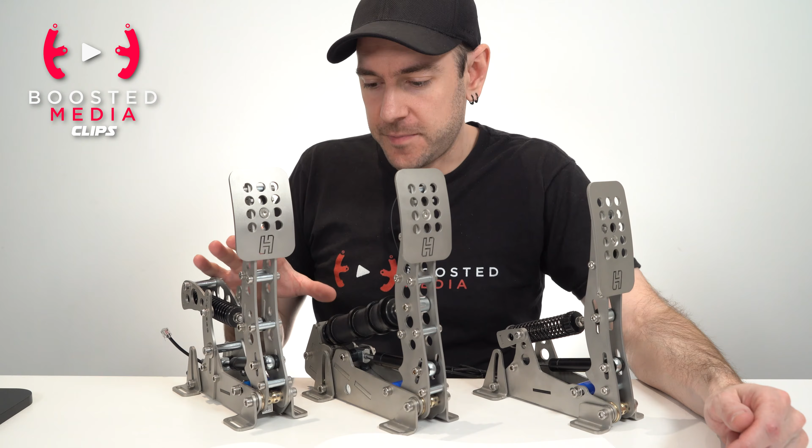Now there are a multitude of adjustments available across all three pedals, and that's one of the things that I loved about my previous set of Ultimates, was just how much fine tuning there was available to not only dial into my own personal preference, but to the different styles of cars, and so simulating the types of different cars that are out there, from street cars all the way through to Formula style and GT style race cars.

Now, what I wanted to do here is a little bit different from what we normally do. I actually want to try and integrate the manual into this process a little bit as well. And what I would recommend is, if you are looking at buying a set of these pedals, actually go and download the manual from the support section of the Heusinkveld website for yourself, because this manual is exceptionally well written and it really does take you through every single little detail and exactly how to adjust it.

And I think it's a good idea to establish an understanding of all this stuff before you actually receive the product. That way you can kind of just dive straight into it. You kind of already know what you're doing, and it's not such a steep learning curve that takes away from the joy of, you know, getting these pedals up and running and driving straight away.

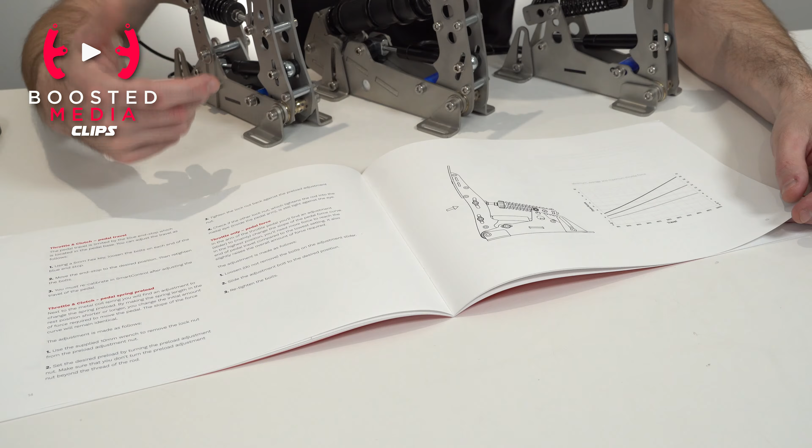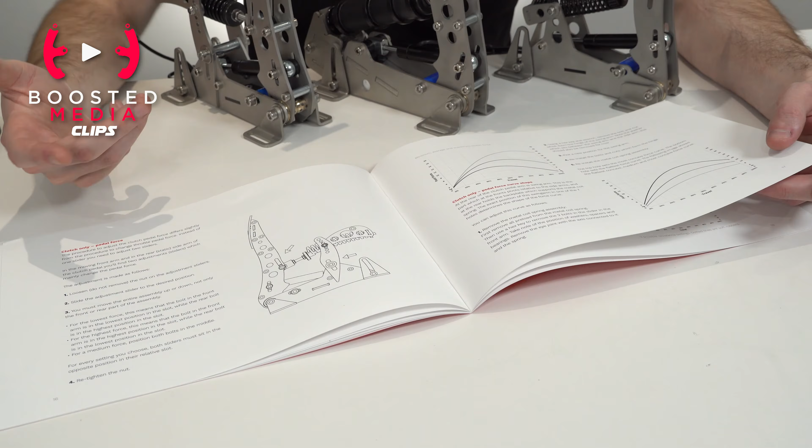So let's just quickly thumb through the manual now. You can see clear descriptions of each of the adjustments that we have available, as well as graphs that are actually mapping out the force and how it applies, whether it's in a linear or non-linear fashion. We can go through here, clutch pedal force, again, graphs that demonstrate everything. I mean, the amount of detail that they go into here, even one little thing I noticed was he mentioned that when you undo the bolts for adjusting the pitch of the pedals, you don't have to worry about the whole thing falling apart on you.

And I think this is really important, because a product like this can be quite overwhelming, and you can kind of be left wondering whether you're actually getting the best experience out of it, simply because of the amount of stuff that you can change. So reading through this, for me at least, really kind of fills me with the confidence to know that I am going to be able to dial it in for the best experience.

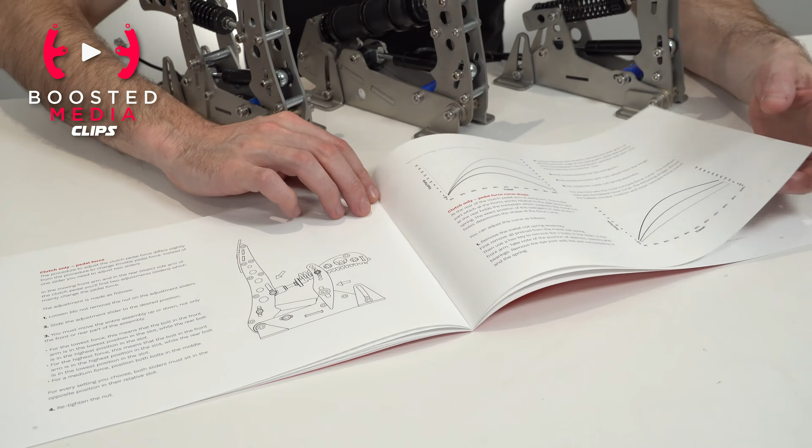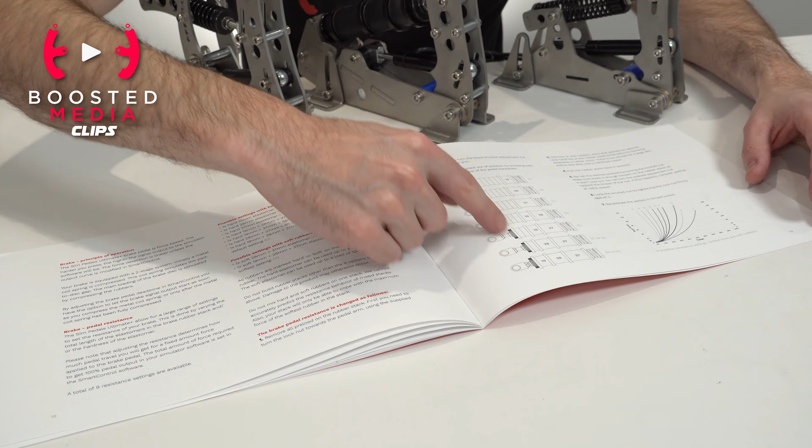So we'll keep going here. Again, this is through to the brake adjustments here. Now you can see the 9 different adjustments that we have between hard and soft springs. And even just here, there's a visual diagram of exactly how that's configured. So yeah, a massive amount of detail here.

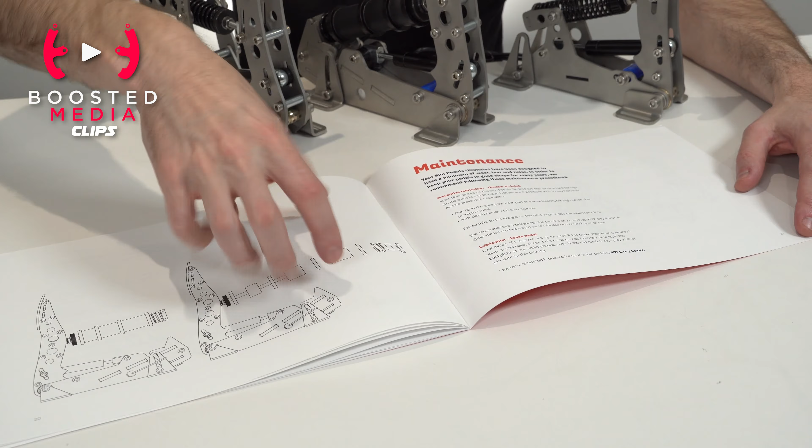And I would once again recommend that you guys download this if you're looking at buying these pedals and getting across it yourself. You can see there an exploded view as well that shows how the assembly goes together. Really, really good stuff. And yeah, something that I really do think sets this apart from other products that we reviewed here. So let's take a more detailed look now at the mechanical adjustments available on all three pedals.

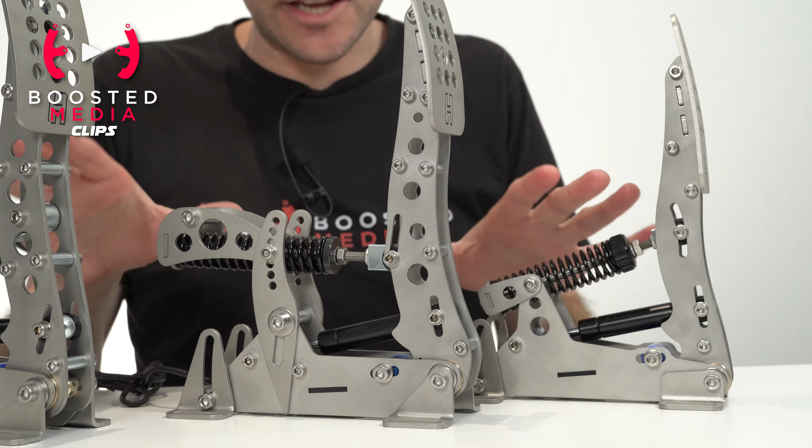So as we mentioned earlier, all three pedals have the same adjustment when it comes to pedal angle or pitch. So we have that 15 degrees of tilt as we demonstrated earlier. As we mentioned before as well, we can adjust our pedal plate. So let's just quickly demonstrate that. So we'll grab our Torx key.

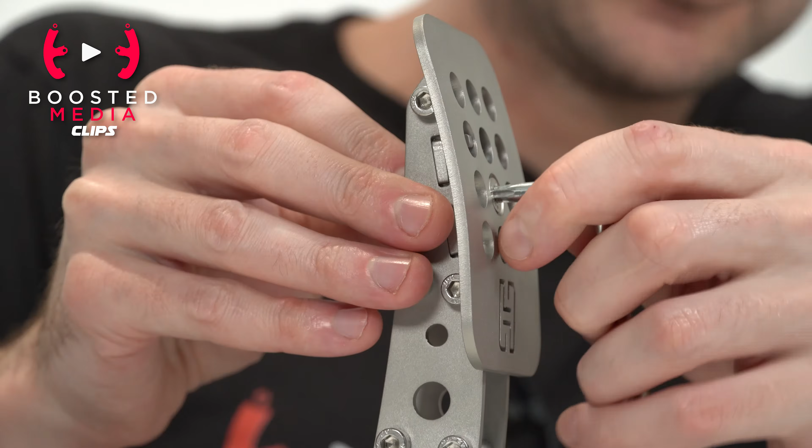Now, one thing I did notice, it wasn't mentioned in my notes, is that they are now using a Torx bit for these pedal faces. So on the set that I had, at least, it was an Allen key previously, and I did have an issue with that stripping out on one of my pedals. This probably has been updated for a long time now. It's probably not something that's unique to the Ultimate Plus, but it was something that I noticed that had changed since my early edition Ultimates.

So we're gonna undo the little nut on the back here. Simply unscrews. So it's just a standard little nut there, not a nylock or anything. And then the bolt slides out, like so.

And then we've got our pedal face. You can see there's a little notch there as well. And then we've got our hole, which is countersunk for mounting the actual screw. And then if we have a look at the face itself, you can see our 3 points of adjustment, and there's a 13mm difference between the 3 of them.

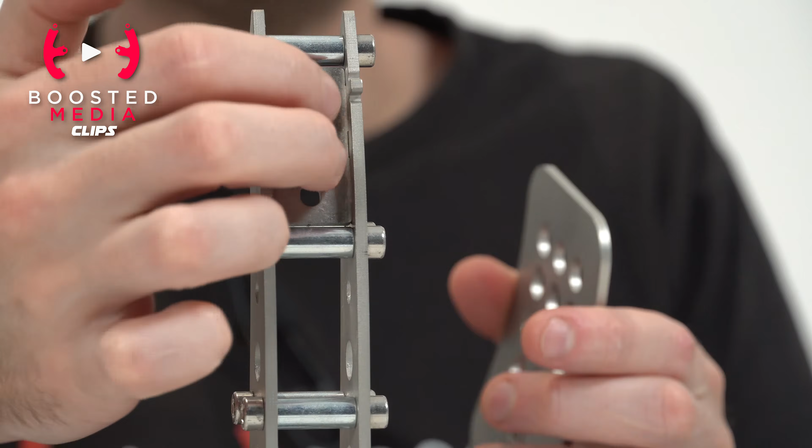So in the bottom position, I'm just going to be careful to line this up properly. So there we go, bottom position, that is 252mm high. Then we go up to 265, which is the default position, and then we can go up to 278mm, which is again another 13mm increment. So we're going to set that to the middle position where it was. That is perfectly fine for me. Simply pop the bolt back through the front, and nut goes back on the back, and we're good to go.

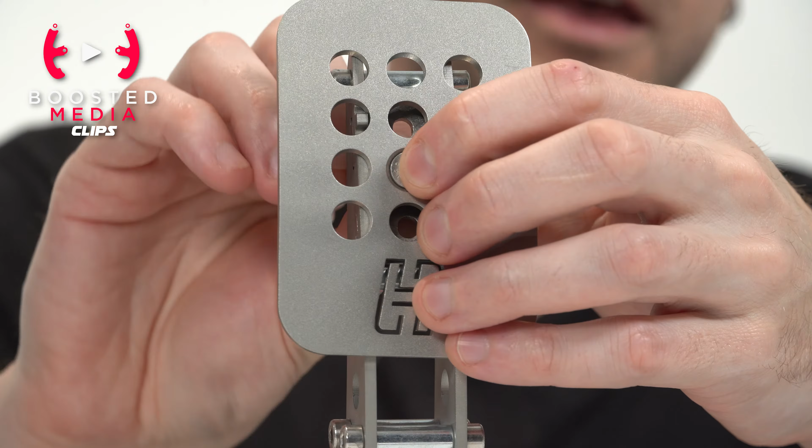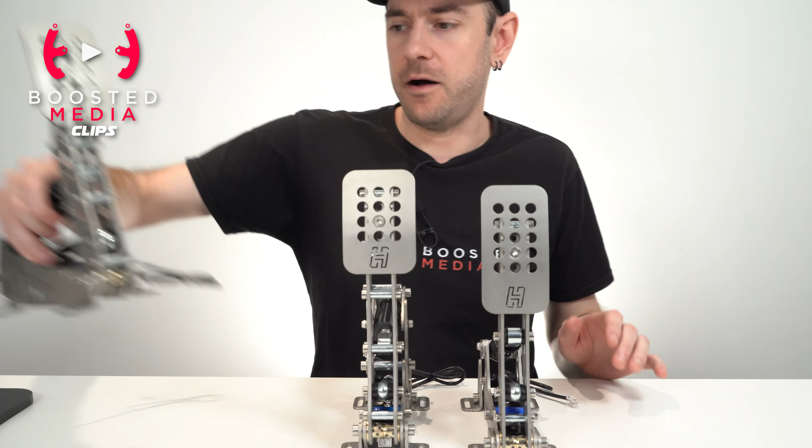So same adjustment across all 3 pedals. Obviously the height is slightly different for our throttle pedal, as you can see here, but otherwise the adjustment parameters are the same. So next up, some adjustments which are unique to the throttle and clutch. So we'll set our brake aside and let's have a look at these guys.

So with our throttle and our clutch, we have the ability to adjust our pedal travel. So the amount that the pedals push down. A little bit harder to push the clutch here on the table, but you get the idea. We can also adjust our overall pedal force, or the amount of force that's required to actuate the pedal, and our pedal spring preload, which is the adjustment for the spring tension here.

So pedal travel is a very simple adjustment. As we saw before, the little blue urethane bushing, all we need to do is just loosen off using the included Allen key the 2 little bolts, just crack those. And then with those bolts adjusted, all we need to do is simply slide

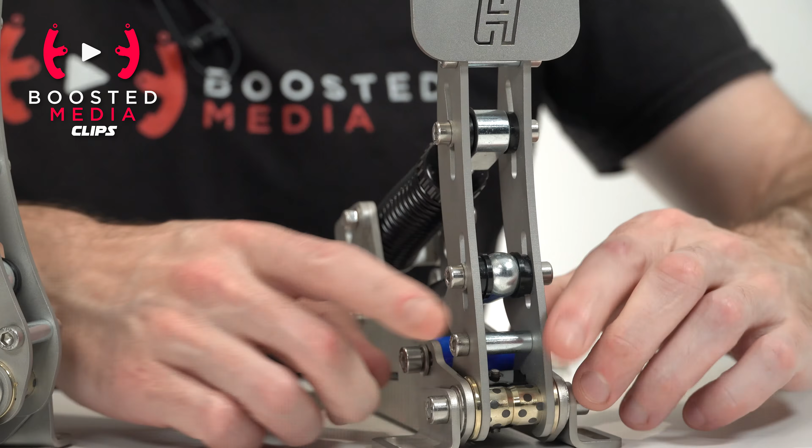forward to reduce the throw, or slide back to increase the throw. It's a little bit difficult because that bushing is squeezed in there quite tightly, but just pull it back all the way forward. And you can see now we have a much larger amount of throw there available. I'm going to actually set it back to close to where it was. I think that their factory preset is pretty good.

Now, one thing just on that note that is important to take note of is the fact that these are pre-calibrated from factory. So as soon as you make any adjustments, you will need to go back in and calibrate them again. But obviously we're going to do that as part of this video anyway, so it doesn't really matter. But just so you know, if you do fiddle with them, you will need to recalibrate. So just make sure it's nice and straight. And then once we're happy, we can tighten that back down.

So next onto spring preload for, again, the throttle and the clutch. This is unique to just these two pedals. So again, we'll work on the throttle pedal here, but it is exactly the same in terms of preload for both pedals. And just referring to the manual here again for the explanation on exactly what this does. By making the spring length in the rest position shorter or longer, you change the initial amount of force required to move the pedal. The slope of the force curve will remain identical.

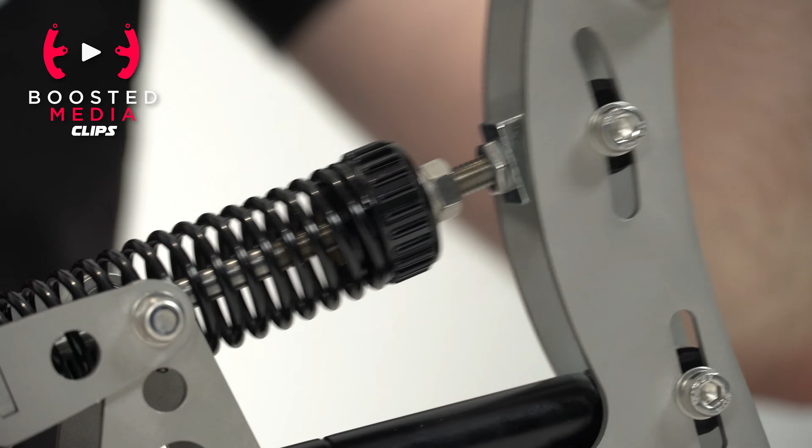So it's just adjusting the amount of initial force needed to get that pedal moving, but it doesn't change the linearity of the force that's applied as the spring compresses. And that makes sense because it is a linear spring here. It's not a progressive spring. So it's not going to change in characteristic as it compresses down.

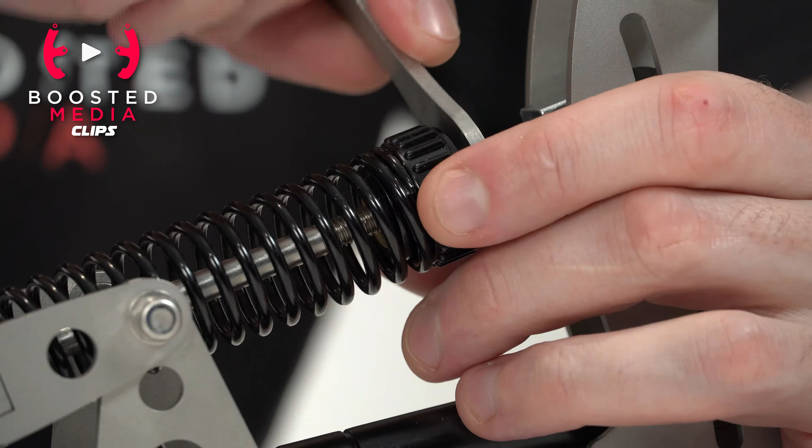So what we do is we take our 10mm little shifter here, or spanner that was included in the box. We loosen off our retention nut like so. And then all we need to do is just wind in or wind out this little collar here. Winding it in increases the preload. Winding it out decreases the preload.

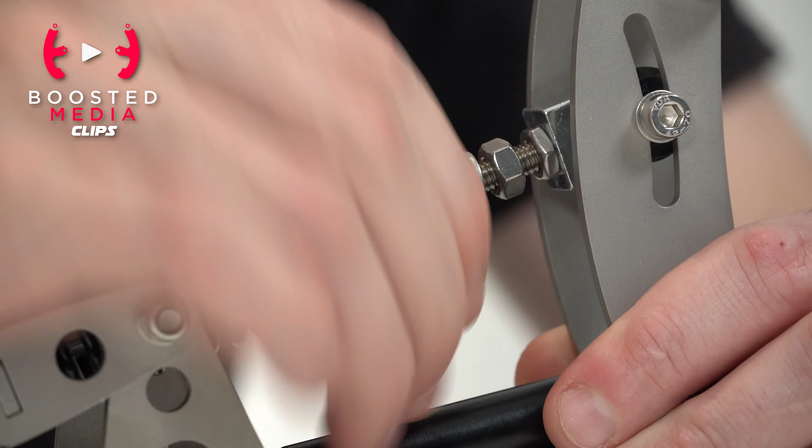We obviously don't want to decrease it to the point where the spring becomes non-captive. And what I mean by that is if you were to wind it out too far, and I don't know whether that's actually going to even be possible on these pedals, I'm guessing probably not. But if we wind it out all the way, you can see there, even with that preload wound all the way out, our spring is still captive.

It's not rattling around inside there, and it's still sitting firmly on the spring retainer or the spring perch that we can see just on the back of the adjustment knob here. So that's as simple as that for preload. And again, what that's doing is it's just changing the amount of initial force required to get the pedal moving. So I'm going to set that back to roughly where it was from factory again.

I do like to start off with factory settings as they recommend, and then make any adjustments from there. So we're just going to tighten down that little locking nut again as well. And if you want to, before adjusting these things, you can put a little mark there with a permanent marker, for example, so that you have a reference point and know exactly where it was from factory. If I was smart, I probably would have done that before I adjusted things, but too late now.

Now, just quickly on that, once you have made your adjustment, the manual suggests you also check the little nut here to make sure that's nice and tight up against the eye here. So let's just quickly do that too. I don't think that would have come loose. Yep, that's fine. So we are good to go. Obviously, you just want to make sure that all these things are tight, because anything that's loose will work its way free and move around when you're driving.

And anything that is loose and moves around is obviously going to change how the pedal feels over time while you're driving. And muscle memory, as we know, is extremely important when it comes to pedals, particularly with the brake pedal. So anything that's changing while you're driving is obviously going to ruin that muscle memory and make it a lot more difficult to be fast and consistent.

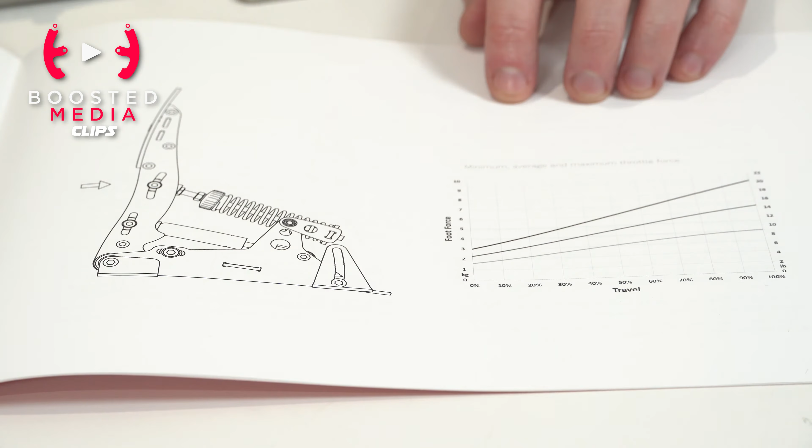Now, if we have a look at the manual here, we can see once again a very convenient force graph, which explains the relationship between the amount of travel and the amount of force that's required. But essentially what we're doing here is changing the slope of the pedal force curve. In the highest position, you'll need more force to reach the end of the pedal travel compared to the lower setting. It also slightly raises the overall amount of force required.

So the procedure for adjusting the pedal force on the clutch is a little bit more involved. We have two sliders this time instead of just the one. So what we've done is loosen off the two bolts, one on either side here. And again, we don't want to remove these because we don't want to have the assembly collapse from the inside. It's going to be a pain to put it back together again. And then same deal with the two bolts just in this position here.

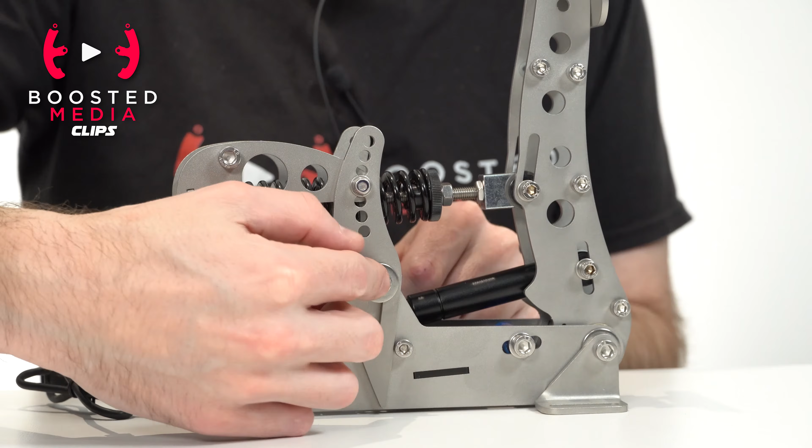What I also would recommend is make a little mark where your preload was set if you wish to, and then just back off your preload until that spring becomes non-captive as well. As you can see here, that spring's now rattling around freely. Releasing that spring tension just makes it a little bit easier to move things around without scraping up your brand new pedal.

So essentially what we have here is an adjustment which raises or lowers this entire assembly, as we can see here. So in the bottom position as it's set now, bottom here and top here, that is our softest setting. And as we move that up through medium, we get to the strongest setting at the top.

So you can imagine now it's going to require quite a bit more force to push that pedal in than what we had at the bottom here. So I'm going to leave that in the default position for now. But what you do need to make sure you do here, however, is raise or lower in proportion front to rear. So we don't want to end up twisting it. That's going to cause other things to kind of go out of whack here.

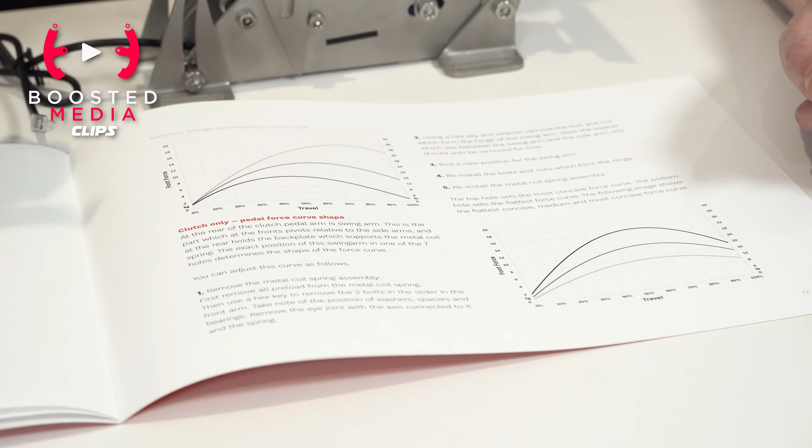So we're going to lower that back down to where it was. I'm going to tighten that up again. And then we can move on to the curve adjustment. So having a look at the manual again, we can see a nice graph which demonstrates the relationship between foot force and travel percentage. But we also have an adjustment here for our pedal force curve shape. And this is what gives us that two-stage effect with our clutch application.

So as any of you who have driven a real life manual car would know, when you push the clutch down, there's kind of a second stage where the bite point is. And this can vary quite a lot from car to car, which is often the reason why somebody who's very experienced with driving one manual car might jump into a race car, for example, and find that they stall it the first couple of times that they try to launch. So what we have here is an additional adjustment. And this allows us to adjust between the typical kind of feeling that we'd have in a street car and of course a race car.

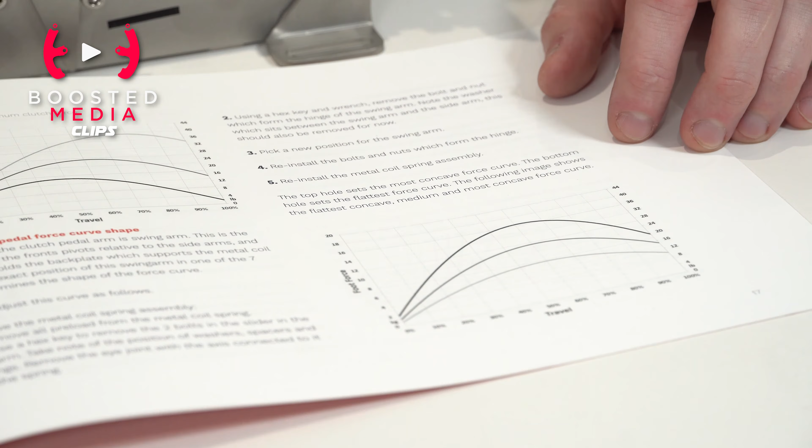So if we have a closer look here, as I push the clutch pedal in, you can see the spring compresses. And then as I get close to the maximum threshold, this whole assembly kind of pivots upwards. Now you can imagine here, if we adjust the position throughout these 7 holes, that's going to influence the curve here. And again, if we have a quick look at the manual, you can see a graph which demonstrates the most concave versus the flattest effect here. So we can't dial it out entirely, but we can reduce the effect by about half here, from 16 at maximum down to about 8 kilograms of force required.

So we'll pop that back out of the way. So what we need to do is again remove the 2 bolts. We can remove them entirely this time around. It's just a washer and then a bolt going through from the backside. We do want to remove the preload from our spring as well. Then we simply move this assembly up to the top for the maximum effect or down to the bottom for the minimum effect. Again, from factory it's set to somewhere in the middle, and I'm going to start off by testing it in that position, see how I feel about it, and then make any adjustments as I see fit.

But again, as was the case with my original Ultimates, just the pure range of adjustability that we have with these pedals really is outstanding. And I'm absolutely certain that regardless of what kind of feel you're trying to achieve, you're going to find something that's going to feel right for you with this clutch pedal.

Okay, so onto our brake pedal now. The adjustment that we have here is brake pedal resistance, of course, and there's a huge range of adjustability. But before we get into that, I just want to touch a little bit more on exactly how this design works, because it's fundamentally a little bit different from what we have with the throttle and the clutch. Remember before we talked about that little tiny spring which exerts a varying amount of force on the tiny little load cell. In this case, we have a massive 200 kilogram load cell.

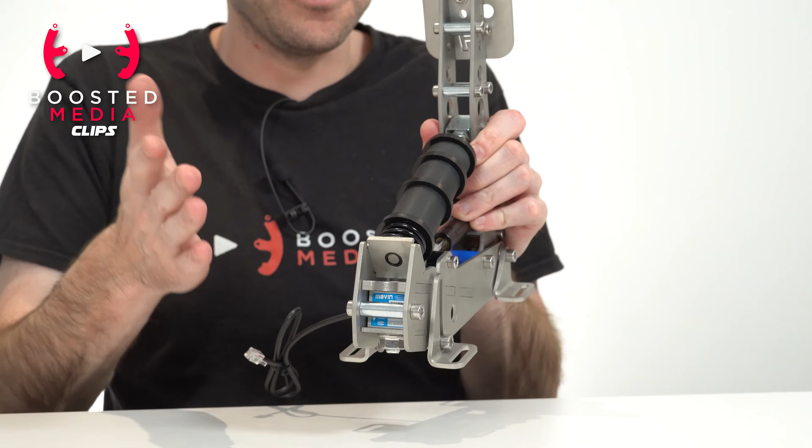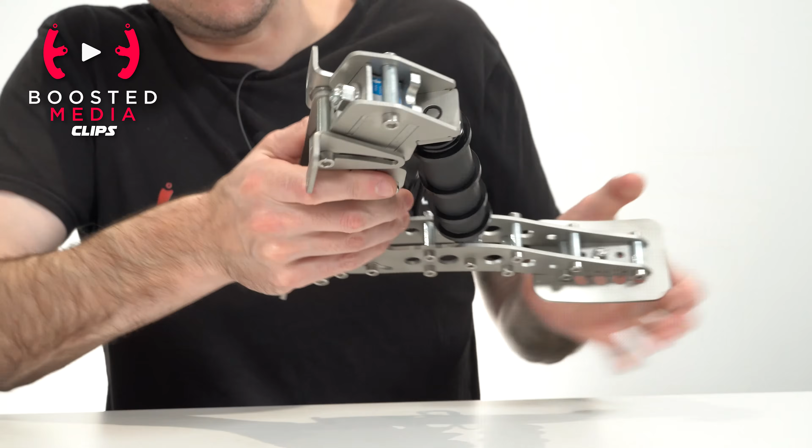These pedals are designed for a maximum force of 140 kilograms though. So don't go thinking that just because it's got a 200 kilogram load cell, you're going to be pushing to 200 kilos. The rest of the design here is obviously intended for 140 kilograms of force. So if we flip it around here, you can see the big chunky load cell on the back here, and you'll notice that the assembly on the back here is a separate piece to the front.

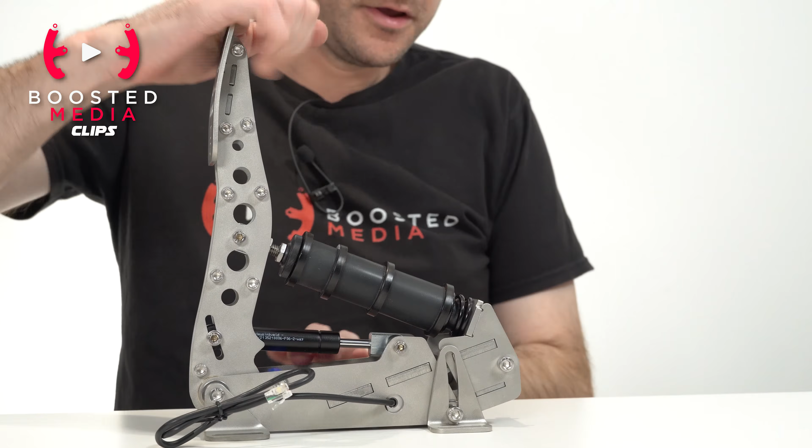So what happens is as we push the pedal down, the force comes through the elastomer springs, through the little metal spring here as well, and we'll explain the relationship between those in just a moment. That force is then pushed through into the load cell. What then happens is you get a slight deflection between the back half of the load cell and the front half of the load cell.

So you can see, because these two halves are separate, as the back end pushes down, we can measure that differentiation between the two. So that slight deflection in the load cell is of course caused by the amount of force being applied to the pedal. That is then converted into a variable voltage. That variable voltage is then interpreted or amplified by the little control box and fed into the sim as braking pressure, which is then applied within the game or the sim that you're playing.

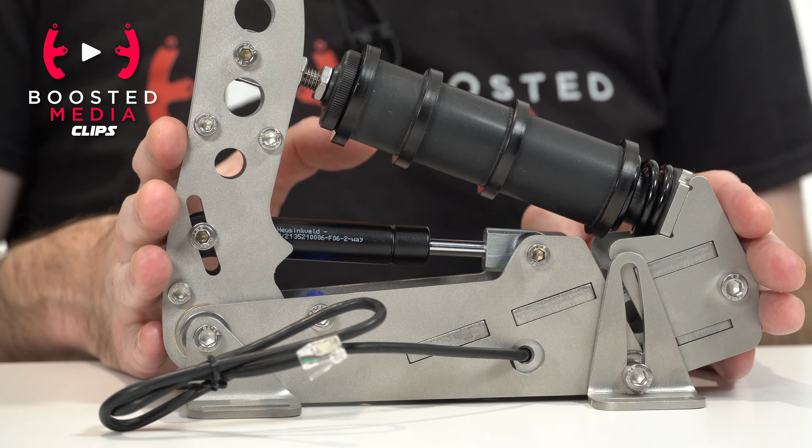So it's important to understand that the force detection as far as the load cell is concerned and the signal that's being outputted into the PC is linear. You can of course modify this to be non-linear in the smart control software should you wish to do so. But essentially what we have here is a 2-stage system which is designed to simulate what actually takes place when you push the brake pedal in a real life car.

So you'll notice the little metal spring here, that is actually designed to take up that initial slack in the brake pedal. And when I say slack, I don't mean slop, and you'll notice there is absolutely no slop in this pedal whatsoever. But in a real car, when we push the brake pedal down, there's always an initial little bit of take up, as it's called, between the pads and the actual brake disc or rotor.

So when you push the pedal down, there's a little bit of actuation or a little bit of force that's applied, which doesn't have a whole lot of resistance behind it up until the point where the pads actually start to interface with the brake disc or the rotor. And that's when the braking force actually starts to be applied to the vehicle. So what this little spring is doing is actually taking up first.

So we push down on the pedal, we can see that spring will compress first, and you can calibrate this to either apply a little bit of braking pressure the moment you start to push down on the pedal. But what most people do, and what's most accurate relating to a real life car, of course, again, depending on the type of car, is to have a little bit of a dead zone there.

So you do have that little bit of initial take up where the pads aren't quite interfacing with the rotor yet. And then once that spring is fully compressed, that's when you actually start to apply brake pressure inside the car. So it gives you that nice little bit of control or feeling in the initial bite of the pedal.

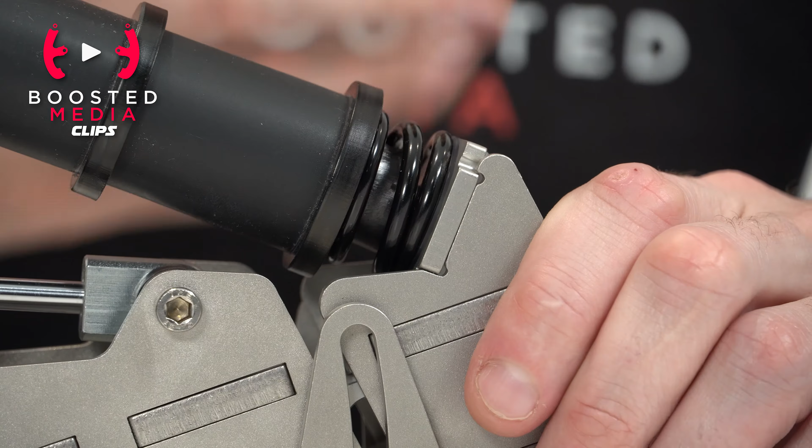Now you'll also notice if you have a look inside here, there is a little stopper here too, and that is designed simply to limit the maximum amount that we can compress that spring. So once that stopper reaches the metal part at the back here, it's not going to compress in any further. And then of course all the remaining force has nowhere to go but through compressing the elastomer springs up here.

And then from there we can adjust the amount of pedal travel as well as the pedal resistance by adjusting the elastomer inserts that we have in our rubber stack here. We also do of course have a preload adjustment too, which influences the rubber stack. But what I would generally recommend is swapping out the elastomer inserts and then fine tuning with the preload later on.

You don't want to be compensating for a massive amount of adjustment by putting a whole ton of preload in there, because that's going to be putting a large amount of tension on these elastomer springs all the time, which is just unnecessary. So as we mentioned before, we have 9 different combinations which you can use to achieve the pedal feel that we want, and then we can adjust the preload slightly on top of that to really dial into exactly how we want it to feel. Now there are set combinations here which we do need to adhere to.

If we do go outside of that range, if we use a weird combination of spacers and elastomers, then we can cause damage to the product. Remember, as we mentioned before, the elastomers are designed to maintain their integrity over time and not blow out or lose their strength. But of course, if we are pushing outside those design tolerances, then problems can occur.

Now, what we get inside the package, as we saw before in the unboxing, is a couple of little elastomer springs as well as a bunch of spacers. So all of the elastomers are marked as such. So we can see here 37 HE soft, 19 HE soft, and 28 HE soft. And then we have the spacers here. The ones that are installed by default are the harder springs.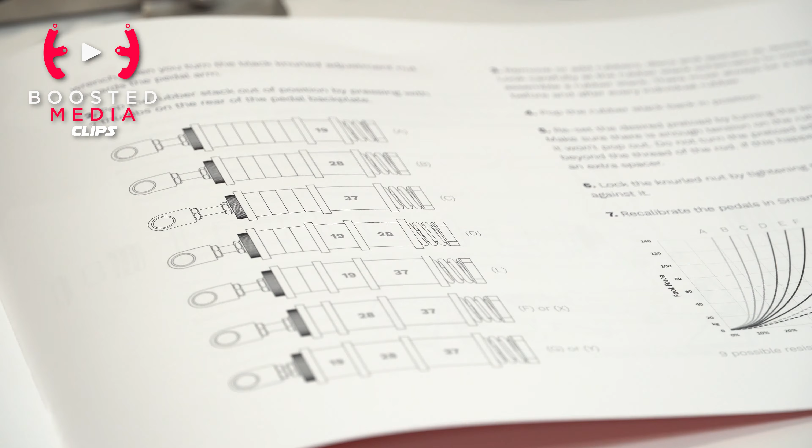And again, if we reference the manual here, we can see we do have a list of all the different combinations, as well as exactly what they should look like once you've put them into the stack. So you can see here we have 1, 2, 3, 4, 5, 6, 7 spacers. Then the thicker spacer, our 19, another spacer, and then our metal spring.

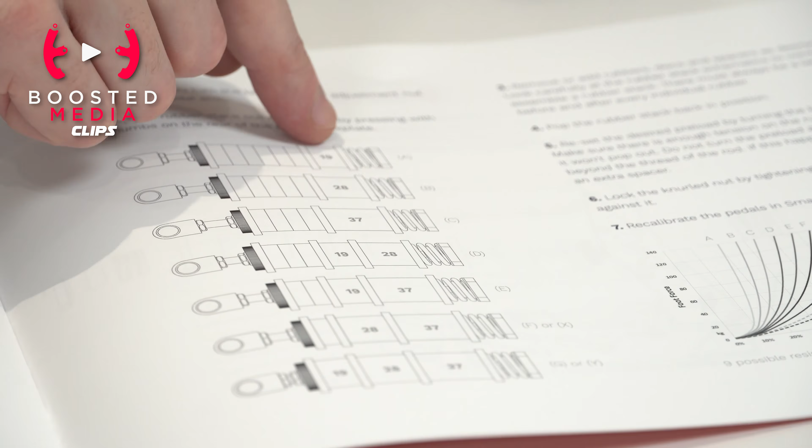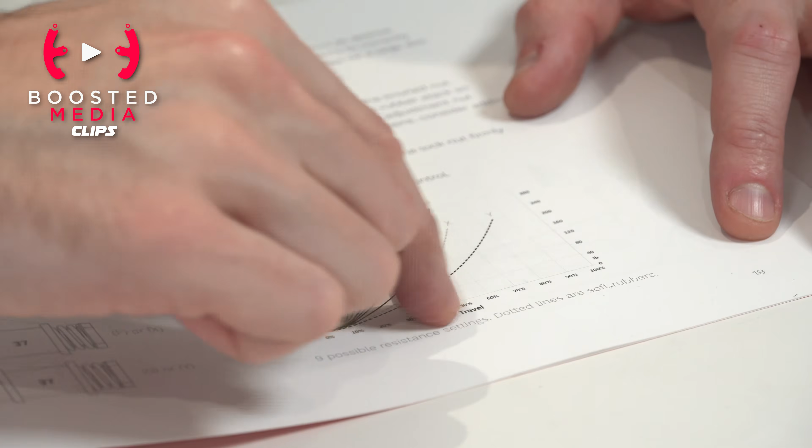So again, very self-explanatory and very, very easy to kind of get an idea of what you might like before you go and adjust it. Now, it's not too difficult to change out by any means, but it's good to have a reference like this just so you're not shooting completely in the dark from the onset.

So the way we adjust this, let's just pop the manual out of the way. We wind off the preload, so you may need to loosen the little retention nut here first. I didn't need to, so just tighten it a little bit, loosen it off there. Loosen off any preload that we have in our elastomers to the point where they become non-captive. So we should be able to see them rattling around there now. We can see we've got our 4 spacers, our spring, and then our back plate.

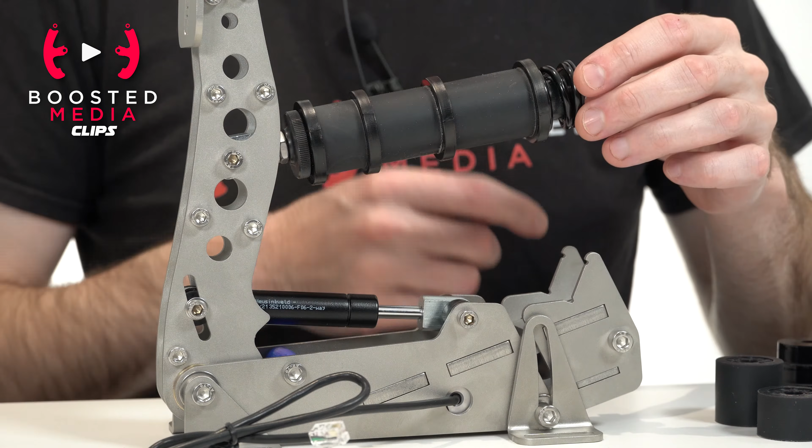So all we need to do is simply slide this forward slightly, tilt it up like so. And we need to pay really close attention to exactly how this was arranged, because obviously if we get it wrong afterwards, we could cause problems. So we've got our back part, we've got a little spring perch, and I'm going to set these out on the table in the order that I pulled them out just so I don't lose anything.

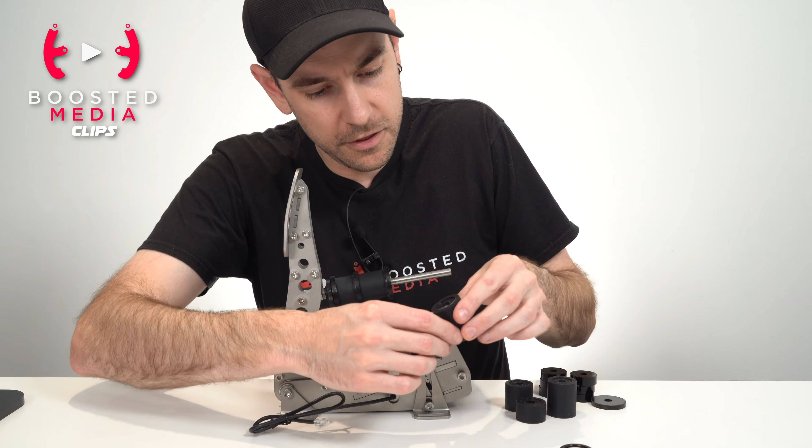We've got our spring, we've got our stopper, then we've got a combination of spacers and springs. So if we pull one of these off, you can see on the top there, 37 HE hard. And we can change that to be whatever combination we want. So again, if we look at that, we could, for example, have 1 hard spring and then all the rest filled out with spacers should we wish to do so, or whatever combination you want. You get the idea there.

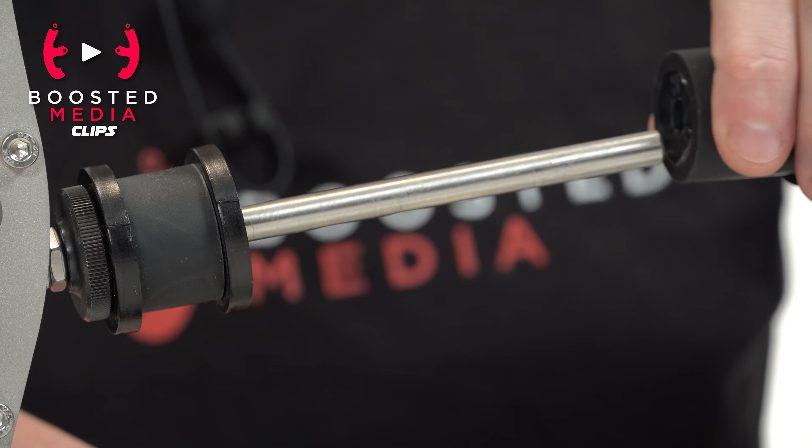And what I would recommend is, again, referencing that guide to sort of get a feel for what you think you might like, and then just adjusting this to your personal preference. But again, it is something that's nice and easy to adjust on the rig itself. You're not going to need to take the pedals off your rig to make these adjustments, which is really important.

So let's put this back together again, remembering again how we had it all laid out. So we'll pop our spring back on too. And we want to pay extra careful attention here that our spring does actually sit over the spring perch here and not squished on the side. It is easy to drop down if you're not careful.

Back piece goes on, and then the whole assembly just rotates down like so, back into our retainer here. And then we just wind in our little bit of preload again. Now it is really important to make sure we do have enough preload on this, as well as making sure that we do tighten our little retaining nut here with the included spanner as we saw before.